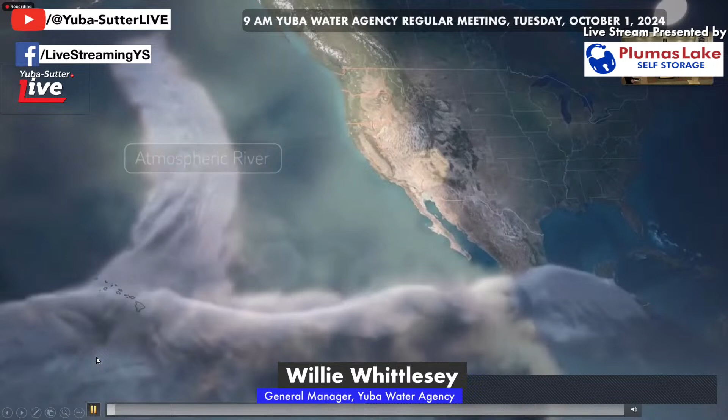At this point, I would like to play slide 2, which is a video that is just a summary of the ARC Spillway, and then we'll kick it over to Dave Gutierrez to get into the history. Before we start the video, I'd like you to ask technical questions that are specific to slides as we go through it, just for clarification. But if you have policy-related, overall type questions, that's what we have the second half hour for, to get into the policy level stuff.

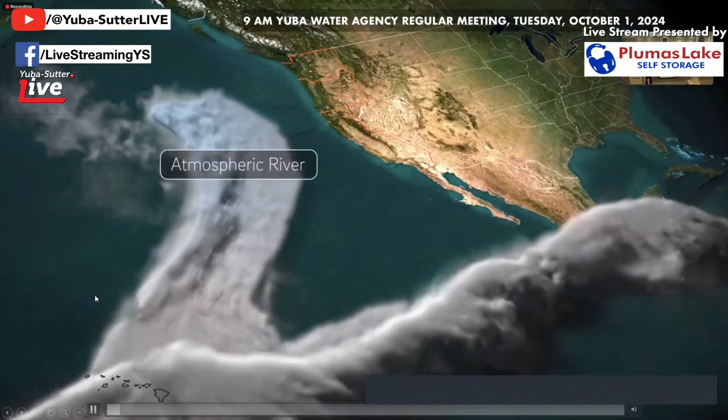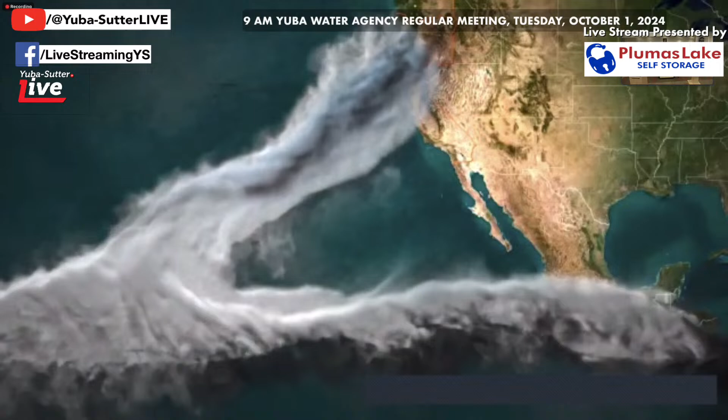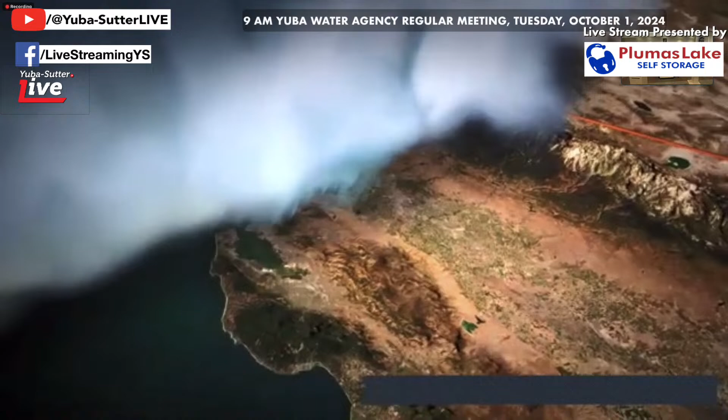Narrow bands of concentrated water vapor produce major amounts of rainfall and snow and are responsible for up to half of California's annual precipitation. Atmospheric rivers begin in the warm waters of the Pacific, where water evaporates into the air. When this humid air meets a Pacific storm, the water vapor is concentrated and driven toward the coast, becoming a fire hose of precipitation. Once the atmospheric river reaches the coastal mountains and the inland Sierra, the collision squeezes additional rain and snow from the system. Atmospheric rivers can be beneficial, replenishing reservoirs and keeping us out of drought, but too many, too close together, can create flooding. Yuba Water Agency is working with partners at Scripps Institution of Oceanography's Center for Western Weather and Water Extremes to better understand atmospheric rivers in our region in order to improve weather forecasts and inflows. We can then use the space in the reservoir to hold back flows when the storm is strongest. The ability to reduce the amount of water on a levee system during the peak of a big storm can significantly lower flood risk.

The reduction in peak flows decreases the probability of reaching or surpassing levee flood stages, as well as the likelihood of overtopping levees. But perhaps more importantly, it reduces the likelihood of seepage significantly, and that is key to levee safety. In fact, most levee failures in California, including the two most recent floods in Yuba County in 1986 and 1997, have been caused by excessive seepage during an atmospheric river storm.

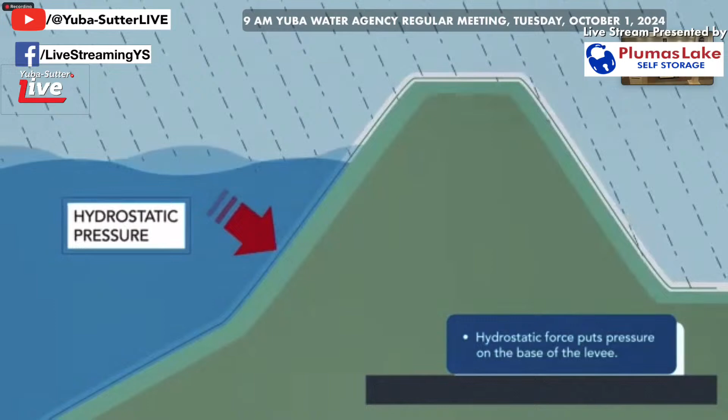Here's how reducing the amount of water on the levee helps. The higher the water level on a levee, the more hydrostatic force is putting pressure on the base of that levee. This is the same phenomenon that makes you feel pressure on your eardrums as you go deeper underwater. As you swim down to the bottom of a pool that's 4 feet deep, there's not much pressure. But when you swim down to the bottom of a pool that's 8 feet deep, you experience more hydrostatic pressure pushing on your body.

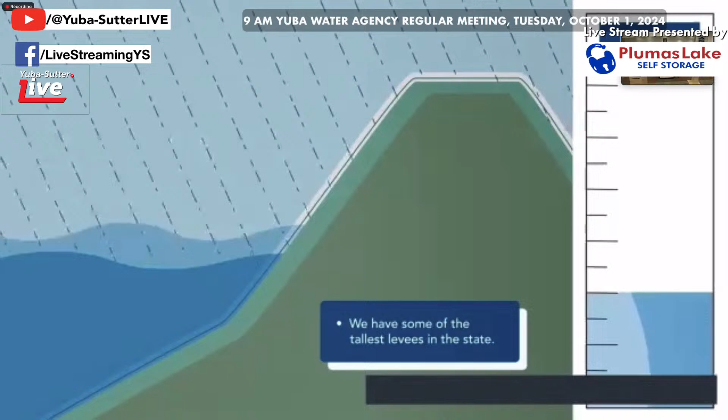That same type of pressure can push and wear on levees. And if seepage finds a weak spot in the levee, the hydrostatic pressure will push flows through and erode the interior of the levee, eventually causing it to fail. So if the water in the river is 30 feet deep, the pressure at the bottom is much greater than if the water is only 20 feet deep, and that pressure decreases as the water level gets lower. In fact, some of the levees in our area are among the tallest in the state, so there's a ton of pressure on them in a storm when the channel is filling up.

Every foot that we decrease the water level can result in a dramatic reduction of the pressure on the levee. So, building the ARC spillway and implementing forecast-informed reservoir operations at New Bullard's Bar will lower the downstream water levels, which reduces the pressure on the levees and the probability of seepage, thereby decreasing flood risk and significantly improving public safety. Find out more about this important public safety project at yubawater.org.

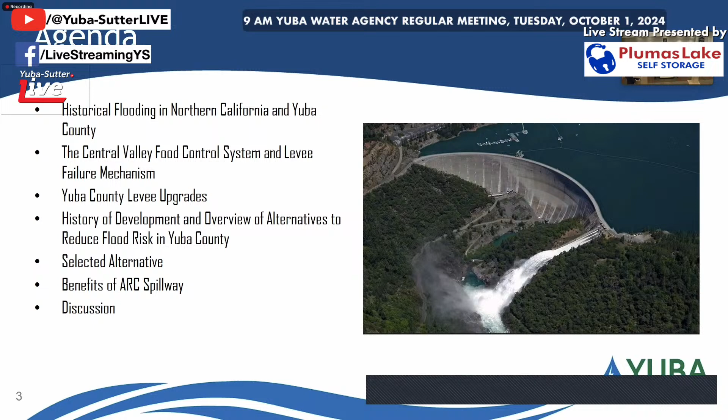Flooding in Yuba County has been an absolutely critical issue, and you saw that on the video here today. You have the west coast of California, the Pacific Ocean, and these high, tall mountains to deal with. Once in a while it sets up and you get these warm rivers of water coming into California, pounding the Sierras. You've got these steep slopes, and the water comes down and hits your valley so suddenly. This has happened forever here in California.

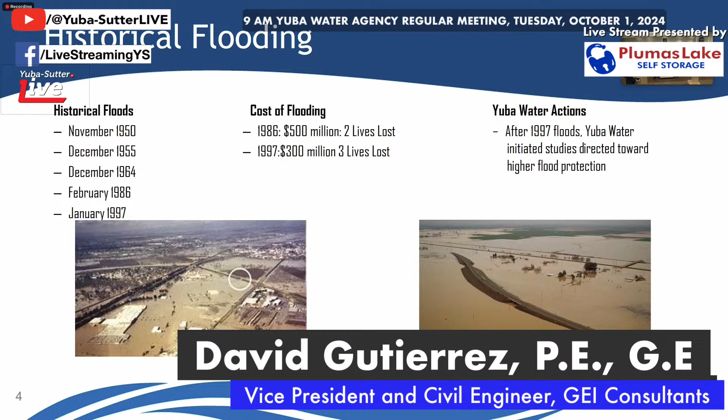As folks started moving into California in the mid-1800s, they started trying to build things like levees to tame that river, but we're never really going to tame it. The best we can do is try to manage it. We can't control that river, we can only try to manage it. And so you saw some devastating floods.

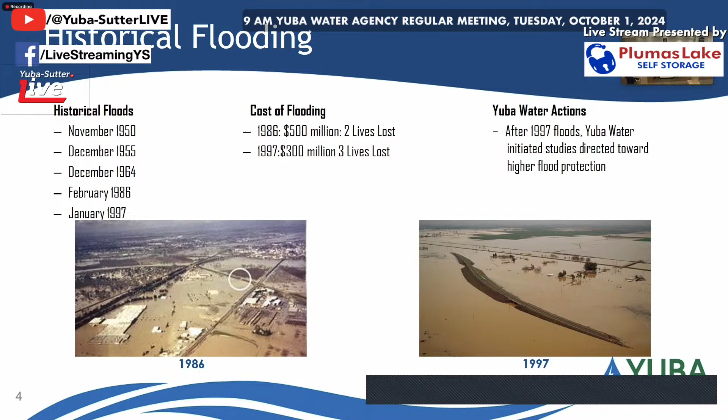Some of you might have lived through them - 1986 and 1997 were some of the most devastating, with $500 million and $300 million of damage. That doesn't count the loss of lives, which you can't put a price on, as well as the socioeconomic and environmental impacts of these failures. That's really what it's all about - that's what we're trying our hardest to prevent in the future. That's what this ARC Spillway is all about.

Never want to talk about flooding in terms of averaging, because there's no such thing as average flooding. We don't know if we're going to get a flood this decade or this year. But when you look at the history of floods here in Yuba County, you get some pretty big floods - usually about a couple a decade, but there's no such thing as averaging. Just because we had one last year doesn't mean we will or won't have another this year. And in the future, it could actually get worse.

We're most likely going to get floods bigger than these historical floods we've seen. Climate is changing, and there's certainly debate about how that's going to change precipitation, but scientists do agree the storms are going to get warmer. In the past we had snow events that act as a reservoir and don't produce much runoff, but it's when these warm storms or atmospheric rivers come that we get into trouble. That's probably going to get worse over the next several decades.

Now I want to talk a little bit about risk. I think the public doesn't understand risk at all, what that term means, and it's partly because of us engineers. We use terms like '100-year level of protection' or '200-year level of protection' - that's just a horrible term. When I was running FloodSafe, we tried to avoid that term because we'd go out to the public and do nothing but confuse them. They'd say something like, 'Well, I don't have to worry about that - if it's once every 200 years, I'm not going to live 200 years, so it's really not my problem.'

And then the site itself. So when you look at a dam, you've got a kind of a finite site. It's not too large, you could actually investigate it and understand it. When we're talking about levees, they're miles and miles and miles long. So it's really hard to understand every single point on that levee. And so it remains to be the weak link.

Now levees can fail in a number of ways. They could overtop, they could erode, but in Northern California, really the levees are having problems with underseepage. And you saw that in that video. What is underseepage? That pressure gets too great, it starts putting pressure underneath the foundation of the levee. That starts moving particles, and if those particles start moving, you get a failure.

And that's what we actually saw in things like 1986 with the Linda Levee failure, and in 1997 where the pressures just got too high. And remember, when we talk about pressure and height of water against that levee, pressure is exponential to height. So every foot you go, 3 feet doesn't just mean it's going to be a little bit more, it's going to be exponentially larger in terms of pressure. So that's what we're trying to prevent.

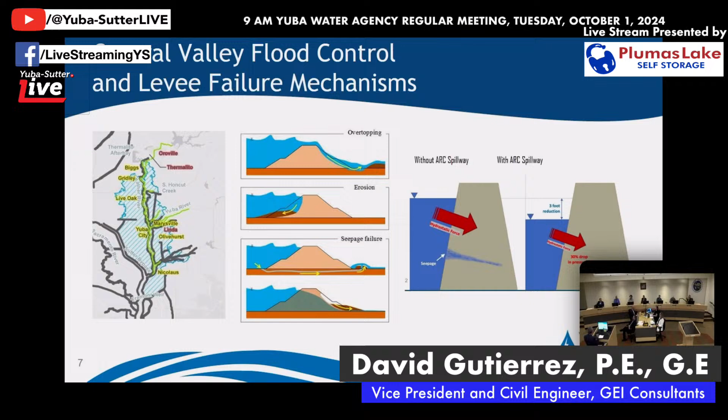Keep the water off that levee and keep that pressure down as much as we possibly can. Now let's get into the ARC Spillway and how you got here.

I think Yuba, I owe you congratulations. They did a very, very methodical approach to selecting this ARC Spillway.

This didn't happen overnight. In fact, in 1998 there was a board meeting after the 1997 event, and I'm reading this, so some of you might have actually lived this. In 1998 there was a board meeting where you all said we need to improve our flood management.

The general manager came through and started laying out some goals: let's try to improve our flood management as much as possible. He gave the direction to the staff, and the staff moved forward and tried to figure out, okay, how do we do that?

There is a methodology to do that. I'm not going to go through every step here, but that's exactly what you did. You started with alternatives analysis. You start weeding out projects. You start figuring out feasibility level studies, which is more sophisticated than alternative analysis. You start doing technical analysis, and you just go through this process. You grind through it, and for the last 20 years that's what you actually did.

As projects surface, they surface because of a variety of reasons. You select the best project to move forward, and you score it as you go. That's actually what you did. And so you actually had about 33 alternatives back in 2001, with an alternatives report that you wrote.

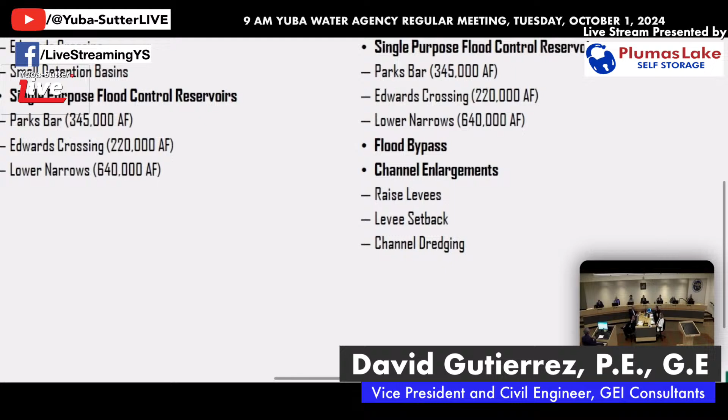A good example would be raising levees. Raising levees sounds like a good idea. I'm a geotechnical engineer, that gets me a bit nervous. The reason it gets me nervous as a geotechnical engineer is every time you raise the levee, you're adding more pressure on that levee.

It's kind of interesting - there's a history book written quite a while ago talking about the 1850s to 1870s, and how they were arguing whether we should have bypasses or whether we should just increase the height of the levees. The Corps of Engineers, the head engineer, wanted bypasses - he didn't want those levees too high. Well, it's lucky he won, because now we don't have 50-foot high levees that would have failed a lot more frequently than they're failing now.

We had a bypass system, so he knew you've got to keep the head off the levee, and he won that argument, and that's what we have. Other problems with raising the levees is there's what's called hydraulic impacts.

Again, back in the 1800s, the whole reason we have a system is one farmer would build a levee, he'd build it a certain height, and then the neighbor would build it a little higher, and then back and forth, and you're not getting anywhere. When you're saving yourself and reducing your risk, you're causing the risk to go higher for your neighbor.

That's why the whole system got implemented, and that's why raising levees, although it should be looked at - and in fact things have changed, and you guys are looking at it again in a 2023 study - that's why it's not that easy to do. It seems like a good idea, but it falls out quickly.

Same thing with things like bypasses. Bypasses are absolutely critical for the success of flood management here in the state of California. Building a bypass today is going to be a lot different than it was back in the 1800s, just because things like land acquisition and environmental challenges drive up costs. So when you get to it, it sounds great, but then it starts reducing its score.

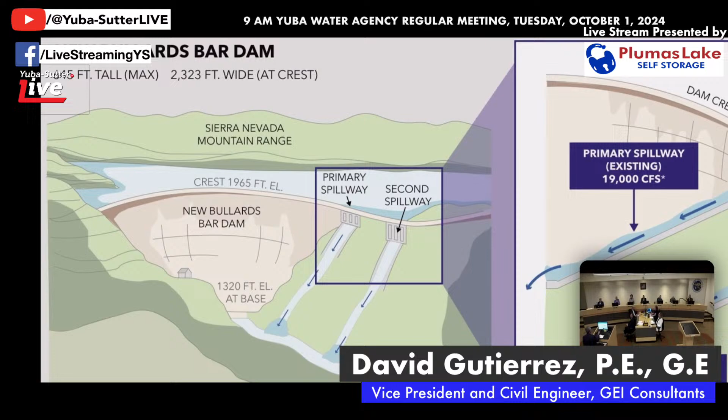Now, once you select an alternative, you're still not done. You're always going back and forth, and you're always reevaluating. That's actually what was done here at New Bullards Bar Dam. When the concept originally came forward, it was thought, okay, this won't be too complicated—we'll put something in the left abutment, we'll put a spillway in the left abutment.

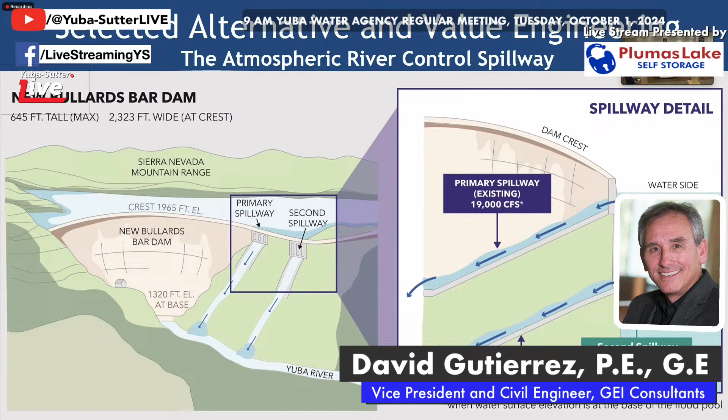You have this big rock knoll over there in the left abutment. It will not affect the existing dam, but it makes sense to just pound a hole through there—build a tunnel and build the project that way. Well, we started getting into it, and we didn't get too far before realizing that probably isn't going to be the greatest idea. So what we did is we developed what's called a value engineering workshop.

So you have the design team rethinking things and figuring out a better way to build this same thing. And then we invite independent folks who have nothing to do with the project to come in, look at it with a fresh set of eyes, and come to a solution that may be better.

In fact, both the design team and the independent consultants came to the same conclusion: the tunnel was not going to work. It would have worked, but it would have cost a lot of money—it's just too complicated with the hydraulics. It was going to deal with a coffer dam that I'll explain later. So we decided the best approach is just to excavate out that rock and put in a structure similar to the structure you actually have right now.

Dave, can I interrupt? How did we arrive at the 1.5 feet lower? The 1.5 feet—great question. There's analysis that was conducted by Tom's group, and that's the hydrology aspect of it.

So what is the advantage of the ARC spillway? Remember, I talked about knocking off the peak. What we got to do is knock off the peak of the storm. So as this 300,000 CFS comes in, or whatever the number is, how do we store that? Well, right now we've got a spillway that's pretty close to the top—not real close, but pretty close. Let's knock that spillway down and provide more storage where we can get the water out quickly when we see an oncoming storm, and then capture that big peak coming in.

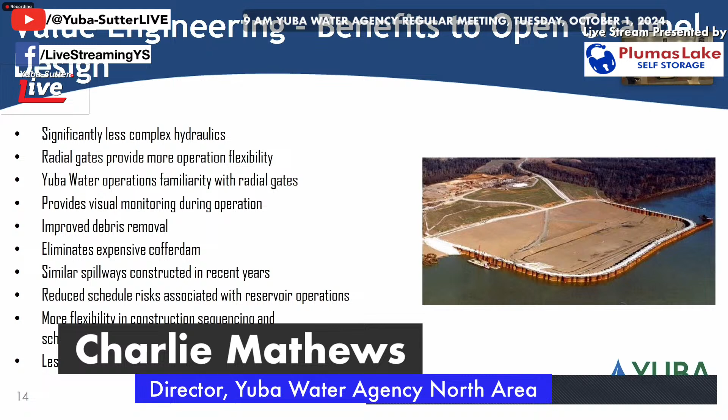The reason I asked the question is because it seems like there's levees up in the Hallwood area that the water has never even hit the base of. So 1.5 feet there isn't an advantage, but when you get down to Marysville, Yuba City, then 1.5 feet matters. That's absolutely correct, the height of the water against the levees is different at different locations. We measured it at different spots to see where it's going to be. We looked at some critical spots, and I think Tom's going to cover that. Your study didn't say where the spots were. No, we felt again, Tom will cover this, but there were critical spots that are, Marysville is obviously very critical. The point where the Feather and the Yuba come together, that's a really important point. So we looked at these different points to see how much this would affect those different locations.

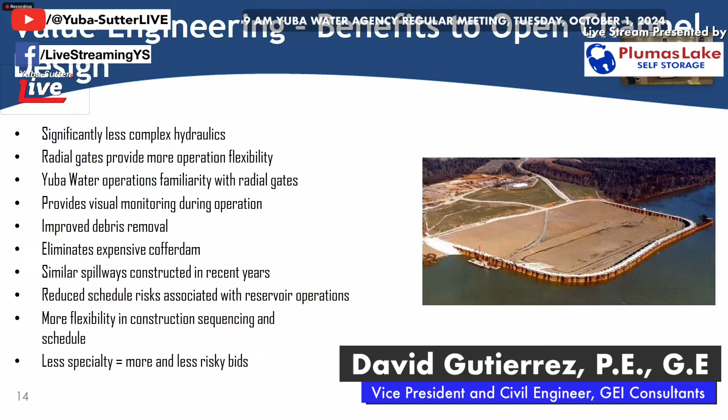But that wasn't in the report, the different spots. I'm wondering if we should have that information. I thought so, but I'm going to let Tom cover that. He'll be able to answer that better than I can. He did that study.

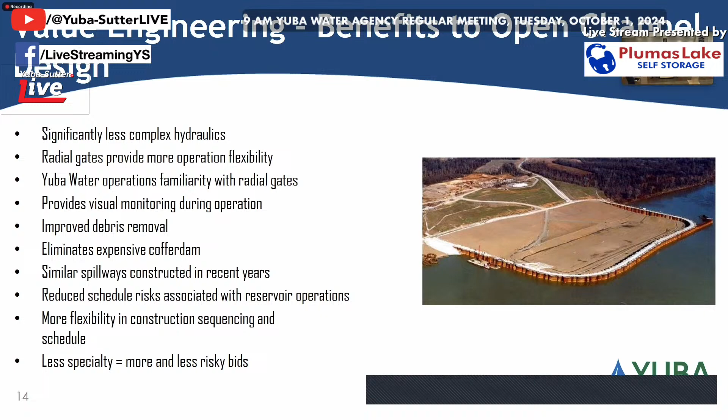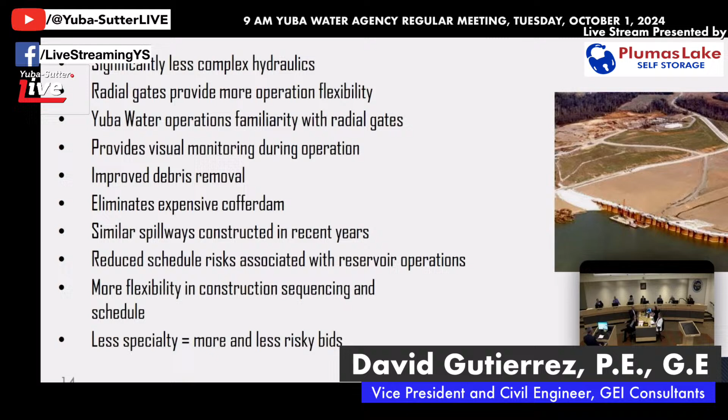So closing up on value engineering, really what drove the cost, and this wasn't realized, and this is the whole point I'm trying to make, is you're always kind of going back and forth and taking a step back to make sure you're going in the right direction. That's what value engineering is all about. We were going to have to build an extremely expensive cofferdam with this first alternative of the tunnel, and that cofferdam itself was going to be $70 million. That's where we just stopped and said, okay, this isn't going to work. And now we're able to use the natural cofferdam for this new system we're going to construct, because we're able to put the outlet structure a little bit further downstream. So that's just how value engineering works. It was very successful here, and as a result, I think we got a much more efficient and the best project going.

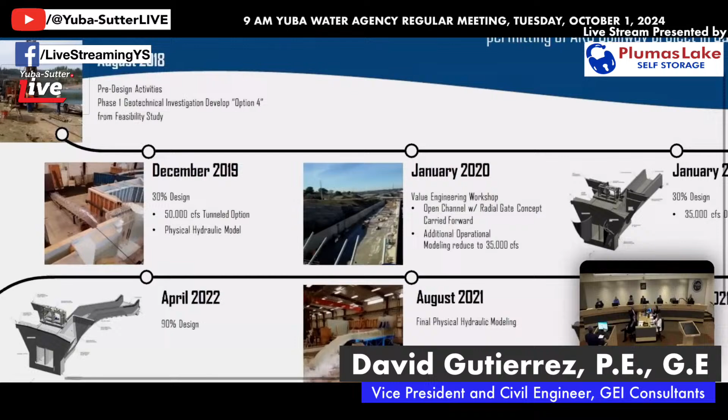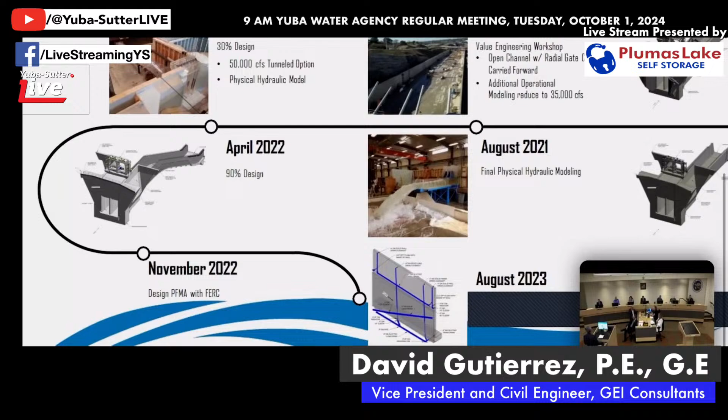So now the design, where are we in the design? I think I remember coming here in about 2018 when we started talking about this, and it was this board that approved moving forward with the design of the ARC spillway. And that's exactly what we did. There's a lot of analysis being completed as part of that. You do very complex hydraulic mathematical modeling. We did physical modeling in Utah to make sure all the numbers are calculated correctly. You do finite element analysis of the structures themselves to make sure all the engineering and everything's safe.

And when you do this, we actually had 3 different organizations look over our shoulder to make sure we're doing it right. First is the California Division of Safety of Dams, that's my old organization. So my old organization is reviewing our work to make sure the design is going to be safe for the folks, for the public downstream.

You have the Federal Energy Regulatory Commission. You are currently relicensing your project, but they also have a dam safety branch, and that dam safety branch is also reviewing the project to make sure the dam is safe.

And then we have a board. FERC actually required a board of 3 members. These are experts in the fields of hydraulics and hydrology, geotechnical, seismic, and construction. These folks look over our shoulder to make sure that, in fact, we're designing it well. And so you do this at like 10%, 30%, 60%, 90%, and 100% design. So that's kind of how the review actually takes place.

And we are pretty much at the finish line. We've completed the design. We have to cross a few T's and dot a few I's. We had the final comments from DSOD and FERC. FERC had really no technical comments, a few process comments. DSOD had one technical comment, and the rest were fairly minor. We can easily take care of those, and that's not going to be a critical path. So we'll definitely have this design probably finished early in the year 2025.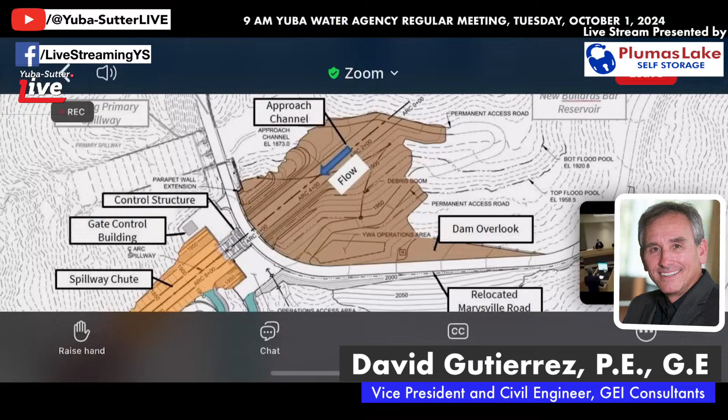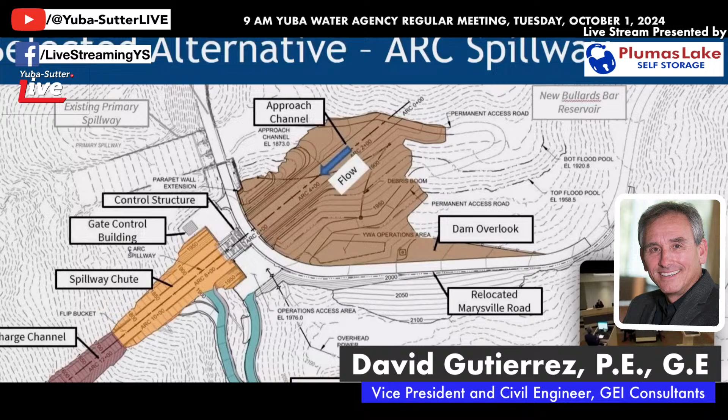We're first going to construct downstream. After we're done with the construction downstream and we have the control structure finished, we take out that knob and put in this approach channel, which is basically just allowing the water from the reservoir to get to this new control structure. And that's what you see in the middle here. This is the control structure. I've got a better view of it on the next slide. And that's what actually controls the water. You're going to see some gates and how that works.

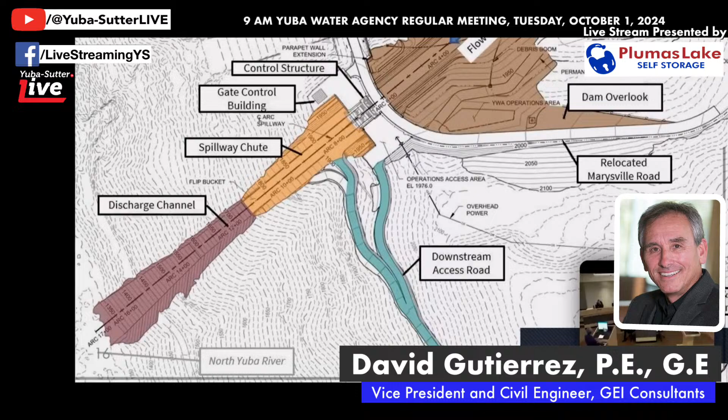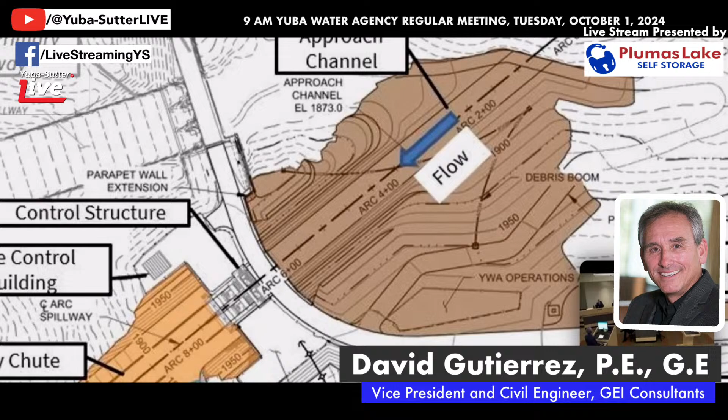And then you have a spillway chute and then a discharge channel. So if you could imagine what you have out there today, you have a structure, a concrete spillway, and then you have a discharge channel. This is going to be the same way. And in fact, we've designed it so that when the water comes down the chute for the high flows, it's actually going to come completely over the discharge channel and fall into the river downstream. We don't want the discharge channel to degrade at all, so we've designed it that way.

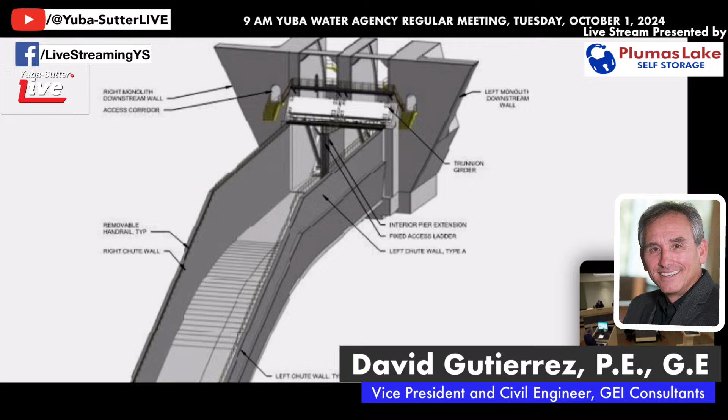This is a close-up, a better view of the actual concrete structure. This is the sets of gates. That's more modern here today, where you have what's called a guard and radial gate. The purpose is to guard against things going wrong with the structure. You have to be able to close it and have it still be working. That's going to adjust the flow, and we could do that pretty precisely.

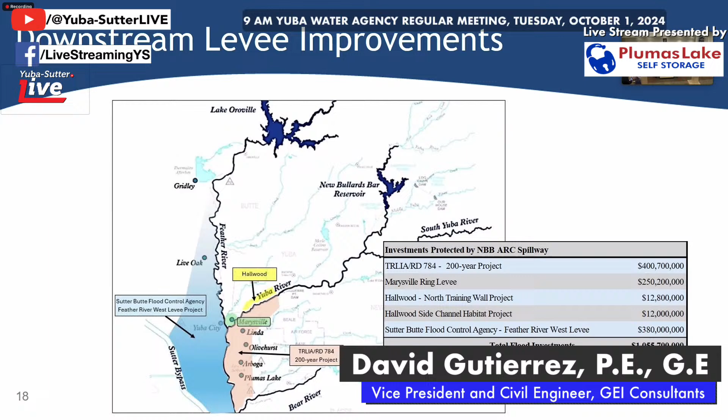They looked at levee improvements. They looked at setback levees, which we did build a few of, and all those things. And what that study concluded is that it doesn't make any sense to do any reservoir improvements until you improve the levees, because the levees were in such bad shape. So for the last 20 years, that's what we've been working on.

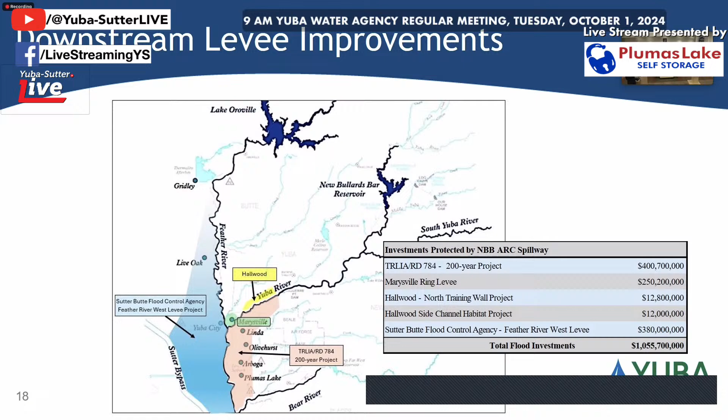So Hallwood, it's on here twice, but we did the levee and the channel improvements, about $12 million each. And then on the other side of the river in Yuba City, on the Sutter County side, the Sutter Butte Flood Control Agency West Levee project was about $380 million. That was mostly state and locally funded, with some being constructed by the Army Corps. So you can see there's over $1 billion of levee improvements that are protected by the ARC Spillway project.

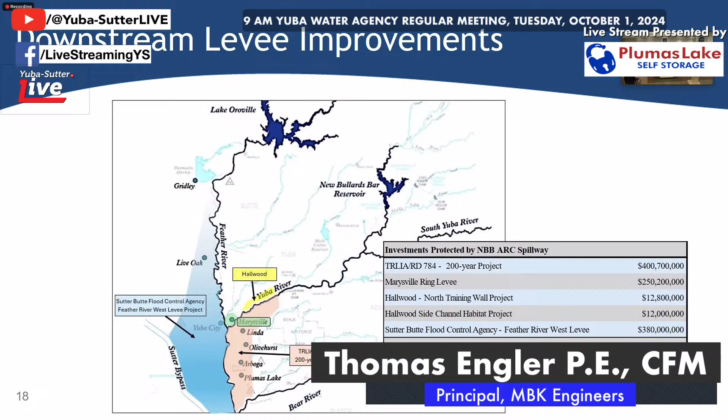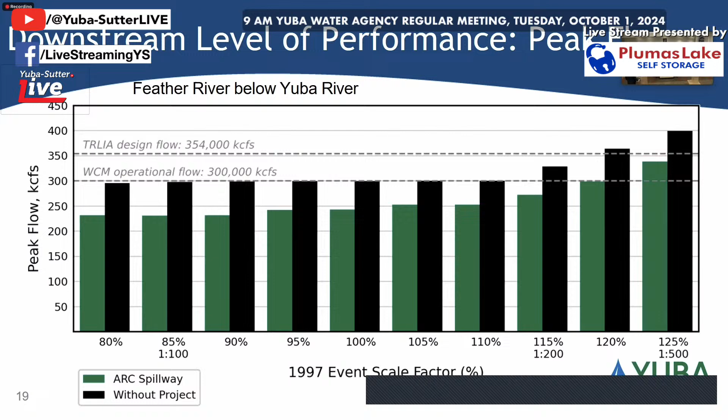So this starts at about 80% of the 1997 flood, going up to about 125%. You can see that not much changes in the without-project condition until you lose control at about 110% of the 1997 flood. With the spillway, things stay pretty close to the same—we keep it below the control until we get to about 120%. After that is where things really start getting crazy in the water world, and operations change from flood control operations to dam safety operations.

So the whole manual gets flipped upside down, and we start really seeing some benefits. This one here is stage reductions. Now, I've been asked why we see less stage reduction as we move through, and that has a lot to do with holding that 300,000 CFS flow. So this is peak stage on the downstream levees, the other one was flows.

That control manual means there's just less of a difference in benefit between 300,000 and the flows we're seeing with the spillway. So you lose a little bit as you get into the 100% to 110-115% range, but then you really start seeing big stage reduction benefits. Now, I say that, but we're talking a couple tenths of a foot, which is pretty instrumental in levee world—we're seeing greater than 2 feet of stage reduction down on the downstream levees from any of these alternatives. That's the important part of this slide.

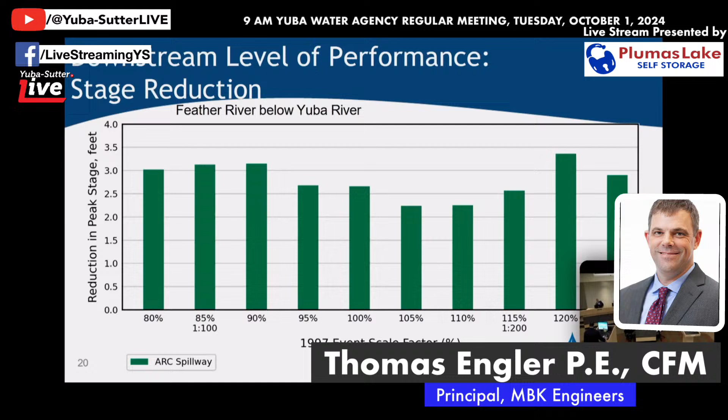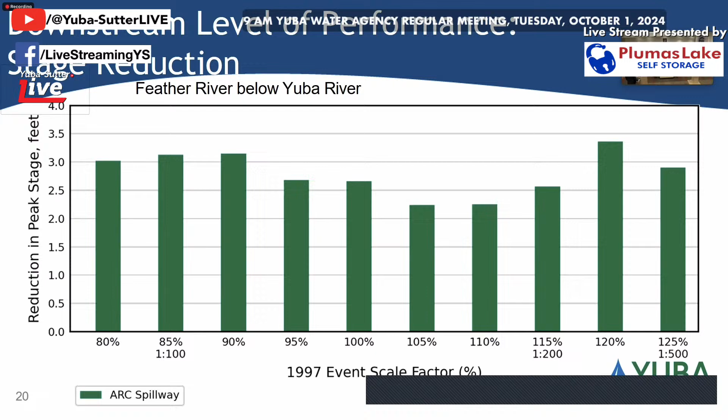If I can ask a question, when we talk about the 1-in-100 and 1-in-200 underneath 85% and 115%, my understanding is the 1997 event was not a 1-in-100-year storm—it was less than that. So I'm not following, because according to this, 100% of 1997 would be somewhere between a 100 and 200 year event.

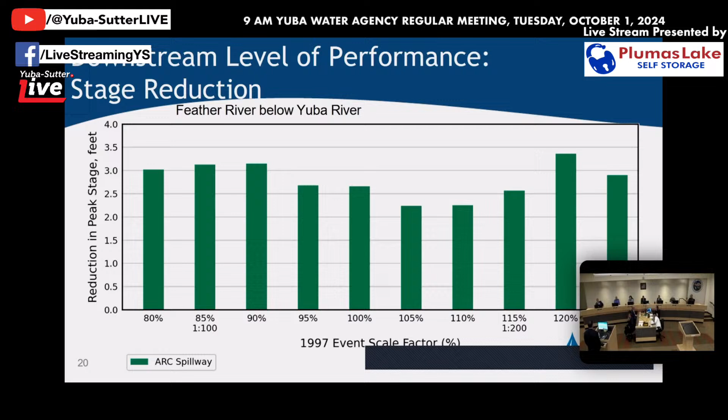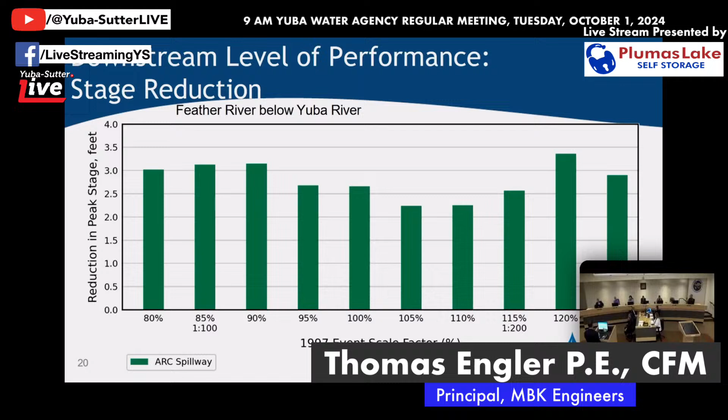The 1997 event was indeed a 100-year event when you talk about flows and stages on a levee. When we talk about events, you either talk about a rain event, which is how much precipitation falls in a 24-hour period, or a flow event on a system. We refer to the flow event on the system, and because of the snow melt, it wasn't the rain that caused it to be a 100-year flood—it was the downstream flows coming out of the reservoirs that exceeded the 100-year level. Gotcha, so it wasn't even a 100-year event, it was more like 150-year or something? Somewhere between 100 and 150 year. Okay, thank you.

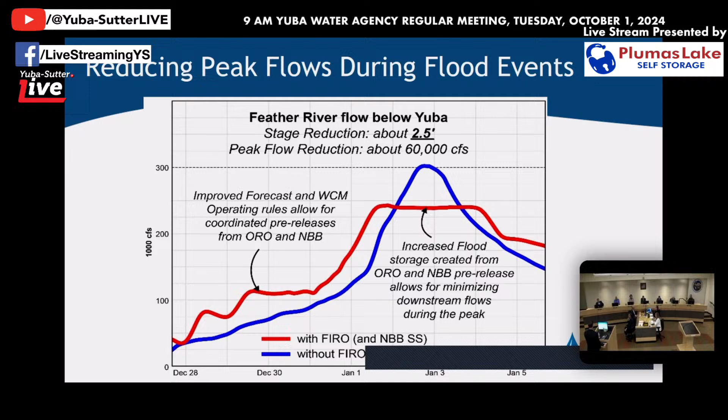So this is the most important graph in this presentation. The blue line is what happened in 1997 with flows and stages, and the red line is if we had the ARC Spillway and FIRO in place, what we could have done. You can see you get to that big 250,000 CFS or so, and then you flatline it through the peak stage of the hydrograph and get rid of it. We're able to get rid of it early, so the red line jumps up early, flattens out at the peak, and then tails off at the end. It would have been a tremendous benefit to all downstream folks if we had this in place in 1997.

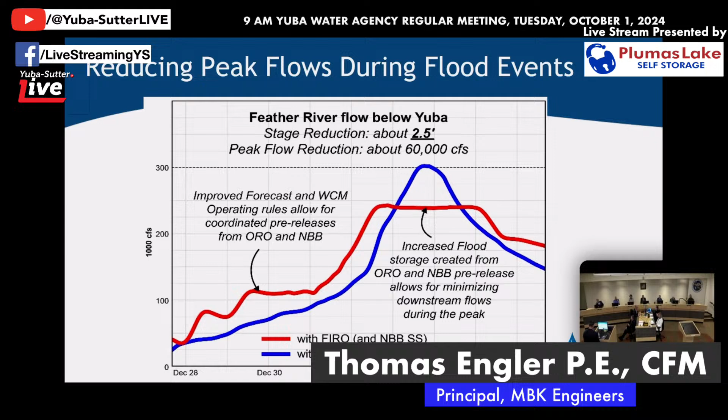So you're seeing this slide a lot because this is the most important thing about levees in California: the force on the levees. The lower the water surface elevation, the less head pressure you have. And as David mentioned, it's exponential, so a couple tenths of difference is big, and a couple feet of difference is huge.

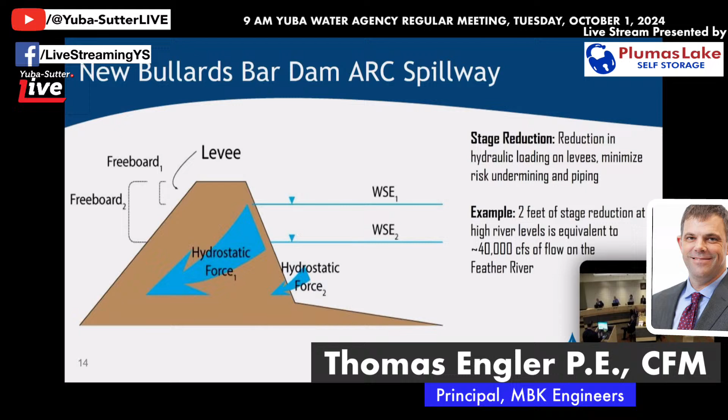So reducing that under-seepage gradient, you can do it two ways. You can stop the flow from coming through, which we do with slurry walls, or you can control it on the land side with seepage berms—we've constructed those throughout the county. The only other way is to reduce the head pressure on the levee, and by doing that, you automatically increase the level of protection throughout the system.

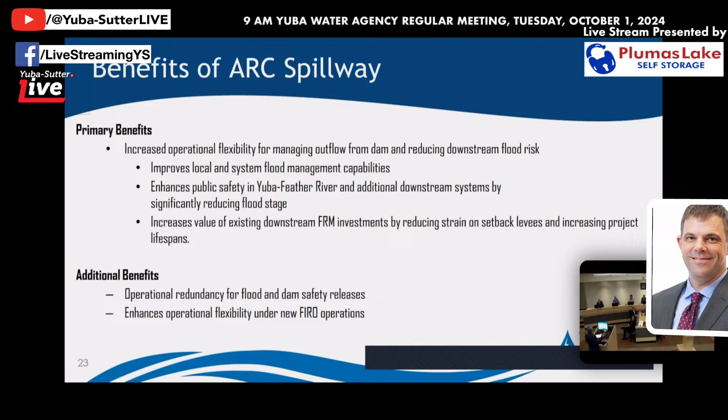So the benefits—I think you just heard the benefits. That's the best presentation you're going to hear about the benefits of the ARC spillway. But there are some side benefits that maybe I'll highlight just a bit.

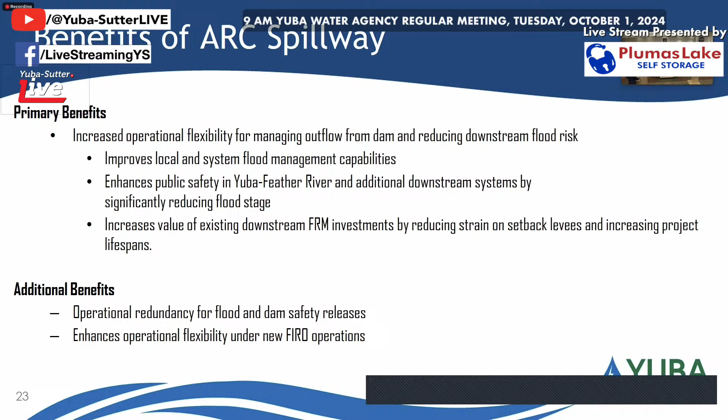First of all, redundancy. I talked about that a bit—New Bullards Bar Dam is one of the largest concrete dams in North America. Because it's one of the largest dams in North America, the consequence of failure of that dam or a component of it is humongous. So we always want to be reducing the probability of failure. You have a great spillway, the spillway works, but if something unpredicted goes wrong with that spillway, we're now going to have a secondary spillway—we could shut that one down, work on this spillway, and have the flows pass that way. That's a huge side benefit that probably wouldn't have been constructed by itself, but it's a benefit in itself.

Another is, I mentioned that when we work with dams, we work with extreme probabilities—not these 1 in 100, 500 year events. We're working with 1 in 10,000, 1 in 100,000, 1 in a million kind of events we're trying to prevent. One is called the probable maximum flood—this is supposed to be the most theoretical high flood that can occur. That doesn't mean it can't be exceeded, but theoretically a very, very big flood. Currently, that very hypothetical flood will go over the top of the dam. So FERC has asked us to look at that and study it—can something be done about that particular component? This will actually fix that as well.

So by putting in this arc spillway, a secondary benefit is dealing with the PMF. During the PMF, we will not have overtopping of the dam. So that's an additional benefit.

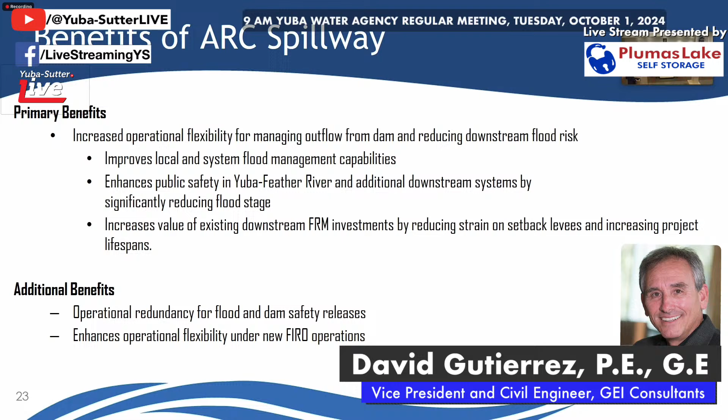Now, the costs are very difficult to estimate the further out you go. When we initially estimated the cost, it was about $210 million. We weren't exactly too sure when this was going to start—you could imagine if you build a major project in 2023, it's going to cost something; if you build it in 2027, it's going to cost a lot more. So when it's going to start has a major factor.

What's very unpredictable is inflation, and it seems more unpredictable now than it has historically. We've had some huge inflation numbers over the last couple of years, and as a result, the costs could change depending on what you assume for inflation. Another important factor is when construction starts and how the construction industry is doing at the time—if everybody's really busy, the construction industry usually has a higher profit margin; when they're looking for more work, the profit goes down. So we had our original estimate, then we had a construction manager come in who was much more conservative on the numbers, and they came in at a different number.

So right now we're thinking somewhere between $210 and $290 million to pay a contractor to actually construct this project, if it were to go with a 2026 start date.

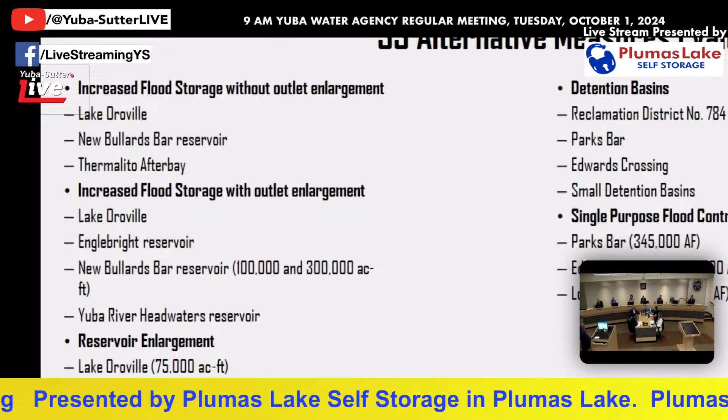And to supplement what Dave just said, Director Matthews, yes, we are heavily engaged with the Department of Water Resources on the update of the water control manual and the incorporation of forecast-informed reservoir operations. We will have a future presentation on those specific efforts and how they align with the Arc spillway, with what you've seen today, and then a future finance plan coming forward.

So in those discussions with Department of Water Resources, Dave just said they're balancing flood control and water supply. John is the lead for the agency on that, and he's in those discussions with them. They're, from our understanding in those dialogues, not currently considering any physical modifications to Oroville. That is off the table.

Like Dave mentioned, we can influence what we control. We own and operate New Bullard's Bar. What we're bringing forward is the most feasible investment Yuba Water Agency can make to improve flood control for the people of Yuba County. We will absolutely remain at the table and have these discussions with the Department of Water Resources, but we have a limited opportunity to modify infrastructure that we don't own, but we will get the most out of those discussions with the update of the water control manual and the incorporation of FIRO.

So the intent is still there. We're doing everything we possibly can. And I think it's obvious, but I have to state it: the 2017 Oroville spillway incident heavily influenced what they're willing to do with their physical infrastructure. So I'll just say the whole landscape at Oroville and the physical infrastructure changed in 2017.

So when you look at studies about, and I'll talk to these because you and I have talked about these individually, surcharging Oroville Reservoir or making modifications to the emergency gate, a lot of those infrastructure investments or opportunities were taken off the table at Oroville related to their infrastructure. Theoretically, they could be done. But the likelihood of moving those forward, especially with no intent by DWR to do that, but only pressure from Yuba Water Agency, it's not likely we'll have that type of influence.

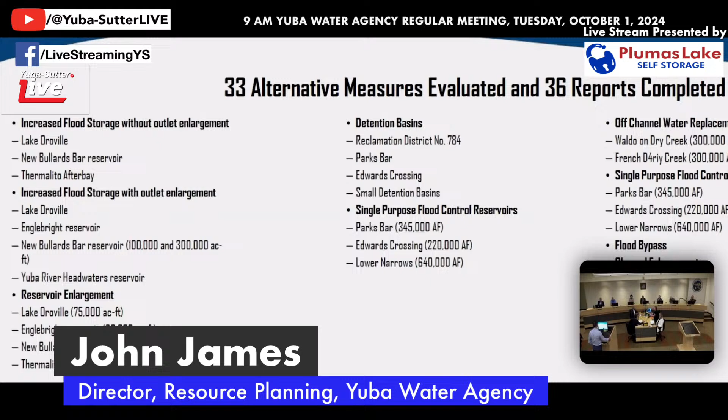Thank you. I know we've made big improvements on forecasting, but it seems like a very critical part of the whole thing. I'd just like to add, John just mentioned that exists today.

That matter-of-hours portion of your question exists today. The risk to downstream flood-prone areas in a matter of hours exists today, but also operational protocols exist today. We have a 1972 water control manual that outlines how Oroville and Bullards are to be operated. Yes, it's not updated, and no, it doesn't include forecast-informed reservoir operations, but it does lay out the communication protocols and planning protocols that we have since improved.

The 2006 adoption of forecast-coordinated operations, and actual big-time experience during the 2017 event. I'm not going to say we're perfect every time, nailing it within minutes, but we do this now, and we do this in events that don't even result in a newspaper article, just high flow events. So this will only serve to improve that, through the incorporation of forecast-informed reservoir operations and the update of the water control manual. Thanks.

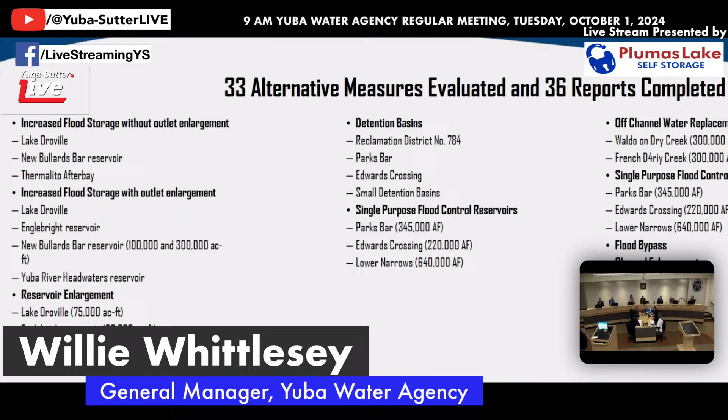One other factor that the water control manual will give us is the ability to have more usable water in drier years. The factor that impacts water supply is the 170,000 acre foot flood pool. That won't change as part of the water control manual. That's the congressionally authorized action in the 1960s was to establish that pool.

However, the operational flexibility around that pool that currently exists today, we can get a deviation and we can encroach in that flood pool today with Army Corps of Engineers permission. What we will do in the future water control manual is further solidify the protocol to gaining a deviation or flexibility in storing water in the flood pool.

You might be referring to the wetness factor at Oroville. The amount of flood control space is influenced by the weather year. That's correct. They have what they call a wetness factor. I'm not super versed in that, but I'm going to make this up, basically it's something close to this.

If it's a high snowpack year and they've already received a lot of precipitation, so the ground is saturated, then they have a greater storage requirement for flood space in Oroville. If it's dry and they haven't received a lot of precipitation and there's little or no snowpack, there's more ability to store water. We don't have that. We have a fixed 170,000 acre foot flood space requirement. That won't change. Again, that was congressionally authorized. That is what it is.

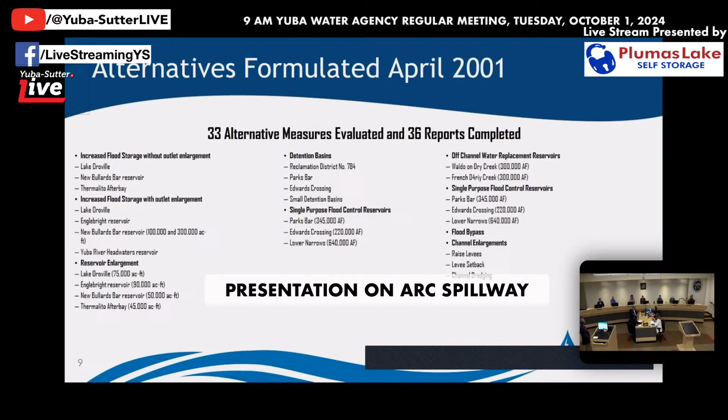One thing I think would really be the biggest need for this is the 96 flood, or the 86 flood, which was a levee failure on the Yuba River. The 97 flood, although it was way down on the Feather River levee, there was also a levee failure in Hallwood. Most people don't know that, but the community I live in flooded because of a levee failure. It was an Army Corps of Engineers levee, and they came back and replaced it on the Yuba River. So I see this would be a huge benefit for everything upstream of the levee.

Not only was there a levee failure in 1997, there was also significant channel erosion on the Yuba River. On my property personally, we lost 10 or 12 acres that went down the river, on both sides. That's kind of an ongoing thing that started in 97 and continues today, and I think this would really help the entire Yuba River channel.

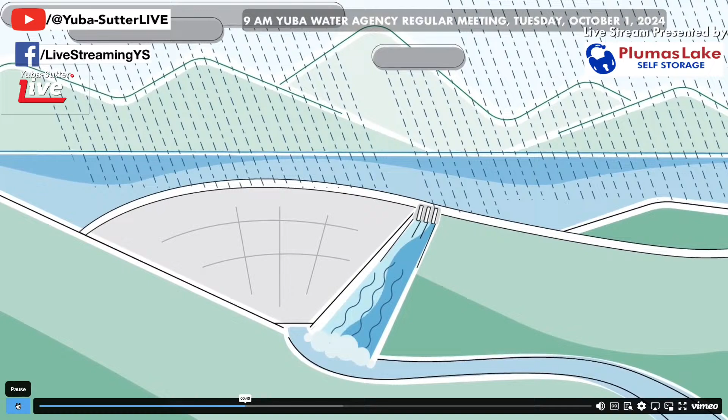My other thought is about the funding. You brought up inflation and everything—if we have this ready, are we going to get enough grant money to offset the inflation, versus if we just said, let's get going on this and build it ourselves and fund the whole thing? It's going to take so many years to build. The way we're bringing in income, we could probably self-fund it, and it would be paid for with what we're bringing in over the years it takes to build. So I don't know if we ought to sit back on our heels and wait for a grant that, at the end of the day, won't really save us any money because it'll cost so much more to build by then.

My final, third comment: why couldn't we build some giant siphon pipes over that thing for a lot less than $300 million? But I'm going to defer to you guys—you know what you're doing on that. So that was it, those are my comments.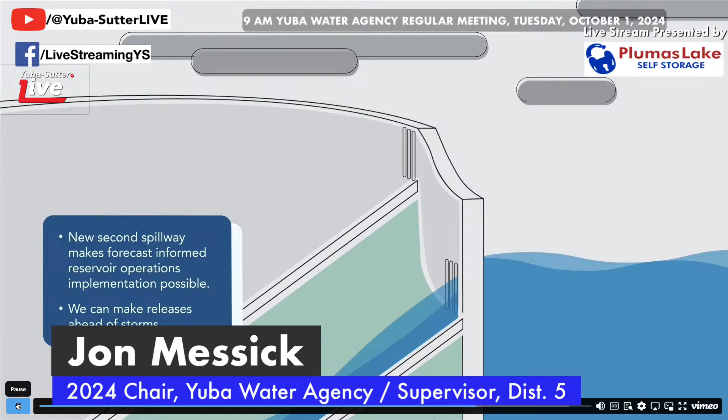This is great, let's have a dialogue about those. I think we have some things to bring up. So first off...

Siphon pipes were part of the value engineering—we looked at siphon pipes. We even looked at having a big tugboat with a pump on the lake that shoots water over the spillway. We looked at those types of things.

Secondly, back to the financing: currently waiting on the grant and other external opportunities is not the critical factor in the timing of the schedule. My goal, and one of the reasons we're here today, is to bring something to the board such that the funding and financing isn't the critical factor. Currently, now that we have 100% design, we're working on the environmental permitting side of things, and the next step is to submit the FERC license amendment to get all the environmental approvals to construct. That's still currently the critical path. Financing is not the critical path, but it's getting close.

If you had asked me six months ago, I would have brought you this presentation with a financing plan today, because I thought we'd have a yes or no on this external grant source by now. But since we didn't, and we're still waiting to hear final approval, I said, we have got to get in front of our board, have this presentation, and remind them of this investment we're about to ask them to make. That way, when we're ready to submit the FERC license amendment and bring a financing package, financing isn't what holds the project back. So it currently isn't the critical factor—I just want to be clear. It's actually the preparation of the environmental permitting, but we're getting close to financing becoming the critical factor.

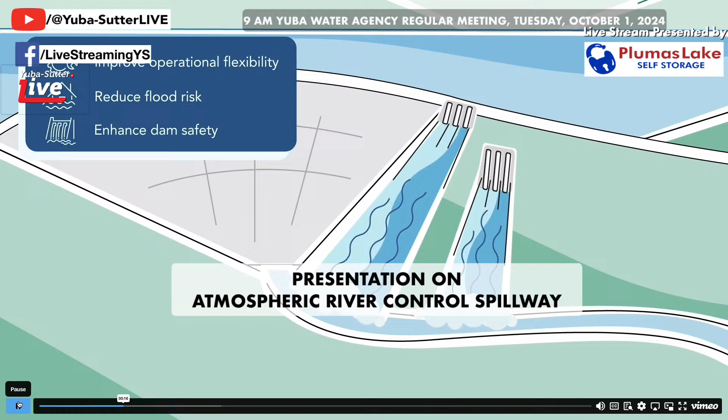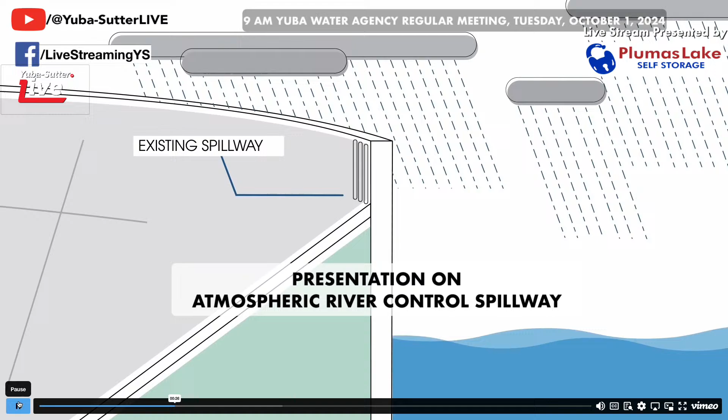So that was my thought, and I just wanted to invite you guys working on this, if you ever want a tour of what I'll call the lower Hallwood portion, because you guys all know what it's like up Daguerre, but all us farmers along the Yuba River from Recology up to Daguerre, I could show you a lot. I've lived there my entire life, clear back to 97.

What happened in 97? I had the state out a couple months ago with the county, and they had no idea that there is an Army Corps of Engineers levee there along the river and that it failed in 97. So it's just something anybody working on that should know. It's not just the flood risk reduction, it's the damage to the entire Yuba River channel that this could have prevented.

I think by 97, it was river channel damage and not a levee failure, because it was overtopping. It wasn't a structural failure. It overtopped right where the levee bends.

Okay, go ahead, Wayne. I guess after today's presentation, I'm even more convinced than I was before. I'd just like to see this thing proceed as quickly as possible and not be a year too late getting it done.

The other thing I think I understand you saying, Willie, is we could pay cash for this based on what we have in the bank right now, but there's no real reason to. It may not cost a lot of money to borrow and keep our cash earning money, borrow part of the money to do this with a bond. There could be a lot of advantages to doing this. We can't look at this like it's just a one year benefit that has to be paid for out of the bank. We have to look at this as a project that will last, I hope, 100 years, and think about the benefit and cost in that context and how we pay for it.

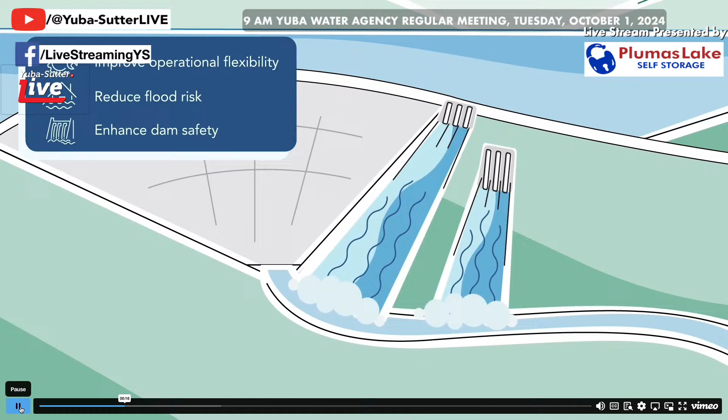I think the difference here, and I'm not saying this permitting process is going to be easy, but the difference is it's at an existing structure, New Bullard's Bar, and it has an absolute well-defined public benefit in flood control. So I think people see that. They see the political implications of that. It doesn't mean you're going to get permits any faster or better, but I think when regulators look at it, they see the proposal and they see the benefit and they take that into account.

All right, well thank you, it's an excellent presentation. So I'm not done.

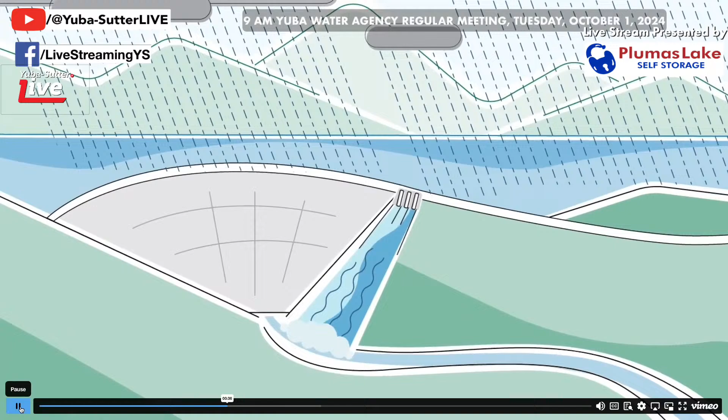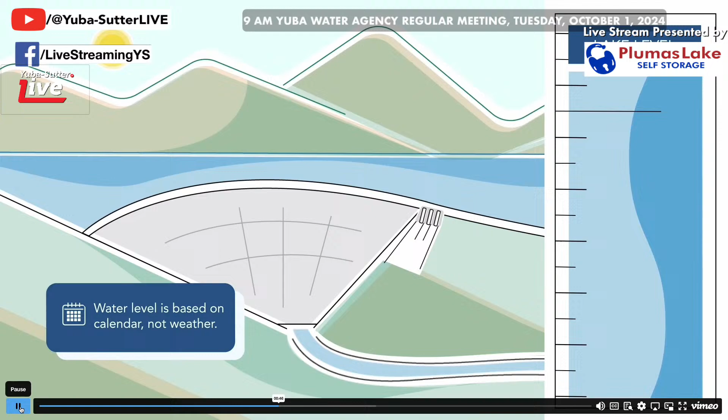I know I've talked a lot, and I've been looking forward to this because there's been a lot of discussion about the ARC spillway over the 6 years since we started to design it. I want to give you specifically what we're going to do next. I know we've talked about it in chunks as we've gone along this morning, but just to be clear, staff was authorized in 2018 to spend up to $11-something million to do design, engineering, and environmental permitting.

Curtis has included in our budgets the last couple of years additional funds to move forward. We're a little over the 11 million authorized, but that's fine.

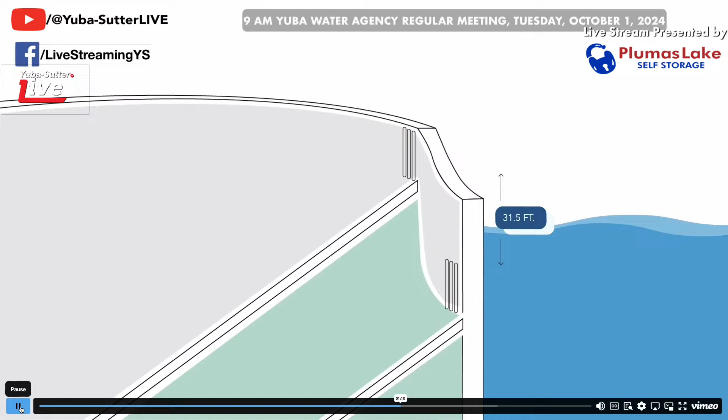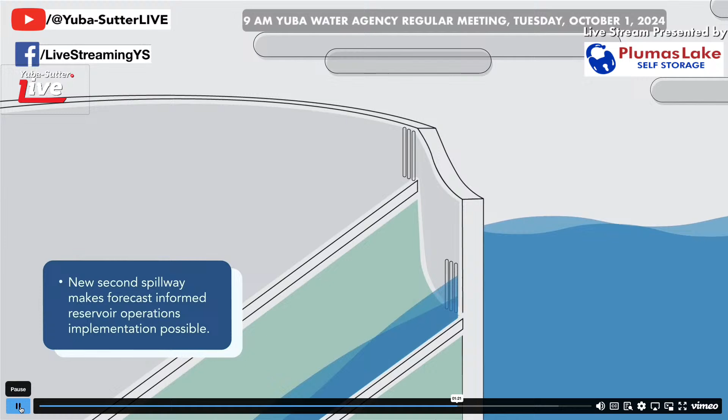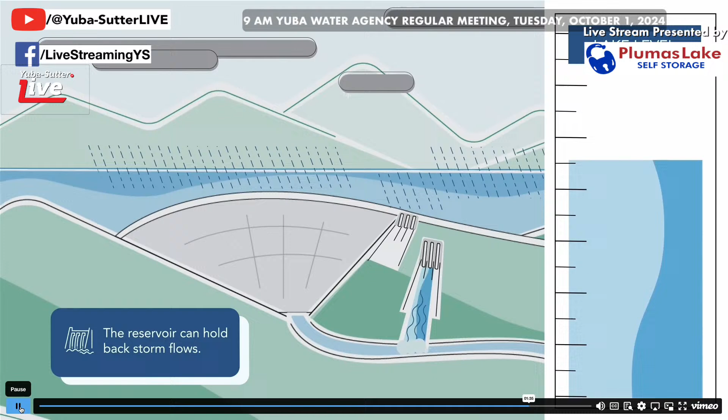What I want to be clear on is I'm interpreting the authority we got in 2018 to do design, engineering and permitting as the general manager having the authority to submit the environmental permit applications. So we're going to move forward with that. That includes the amendment to FERC. There are a few other regulatory things that relate to our FERC license. We'll submit that license amendment, but I'm not going to bring it back to you for approval before we submit. I'm just telling you we'll likely submit that in the next couple months.

GEI and Dave's team will continue to work on the design and be available. Tom's team has worked on the hydrology, and they'll be available for any questions as we go through environmental review. John will continue to work on the water control manual and FIRO, and we will bring you a detailed update on that. I know today's presentation wasn't intended to talk specifically on FIRO and the water control manual. We did a little bit, but we'll bring you a more detailed update on that effort.

And then finally, I think most importantly, Curtis and team and I will bring you this finance plan, and I'm thinking in the next couple of months. My goal was in this calendar year. I'm still kind of sticking to that goal, and maybe shortly after the first of the year. But that's our plan. I just wanted to be very clear on what direction you've given staff and what we're planning to do in the next couple of months. This is kind of touching on Director Bishop's comment there. So that's what we're doing.